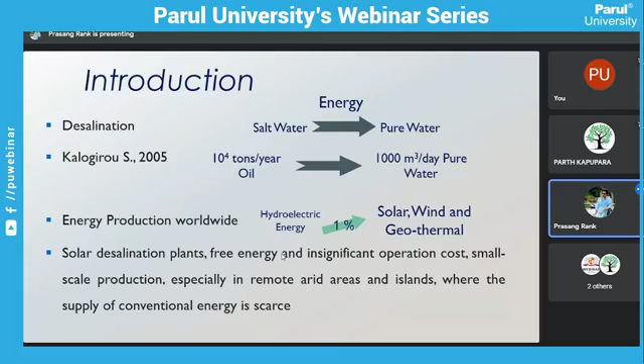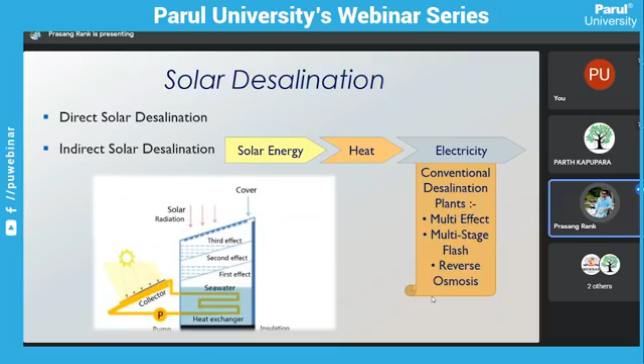Coming to direct solar distillation: this is a picture showing sea water at the bottom of the solar distillation tank, with a glass cover. The radiation coming to the bottom of this plant, the solar distillation tank, the heat energy will convert this seawater into water vapor. Compared to the outside temperature, inside temperature will be more. The water vapor will condense over the glass, and this condensed water can be collected at the bottom of the tank.

In this way we can get fresh water, but it is very less effective. We will get only 200 meter cube per day even in a big area. It is having low operating temperature and low pressure, so we get less efficiency.

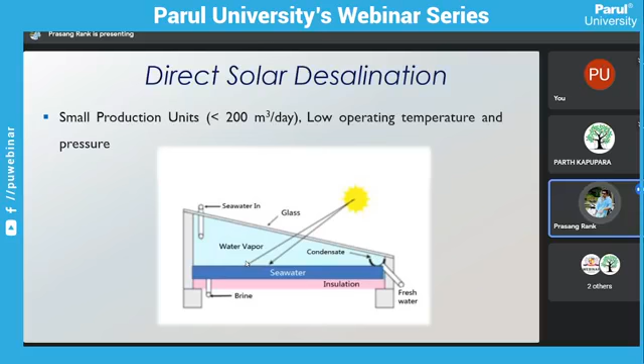So this was a solar still, a single effect solar still. There was only one side, the glass.

This distilled water is generally potable. So what is potable water? Potable water means drinking water, free from salts, inorganic and organic components. Also microbial bacteria are removed. So this way we get fresh water which can be used for drinking purposes.

Also, after the salty water gives off water vapor, sludge will be formed at the bottom of the tank, which can be flushed out through any external water flushing device.

It is said that to produce a maximum of 9 liters per meter square area per day of water, including heat losses, it requires a maximum of 250 watts per meter square of solar radiation for 24 hours. So it is very much less effective, because we require 250 watts per meter square for 24 hours.

Garcia Rodriguez studied this single effect solar still and stated that it gives only 30 to 40 percent efficiency, which is very low. So it has low thermal efficiency and low productivity. It is said that to evaporate 1 kg of water at 30 degrees Celsius, it requires 2.4 into 10 raised to 6 joules of energy. To get this much energy from the sun, we require more efficient techniques of solar desalination.

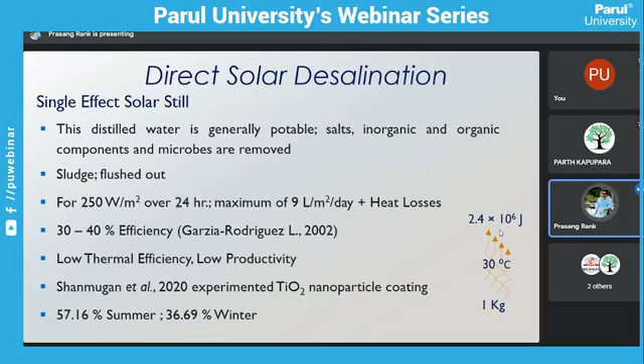Now coming to indirect solar desalination technologies. In this, we are not using direct solar heat, but we are storing the heat energy and using it to produce electricity or any other heat source medium for solar desalination.

So the heat will be trapped in the bottom layer, and through some heat exchanger or tube, we can use this hot water at the bottom for solar desalination or to produce electricity. Generally the lower layer reaches 70 to 85 degrees Celsius during the daytime, and this can differ between summer and winter according to the temperature.

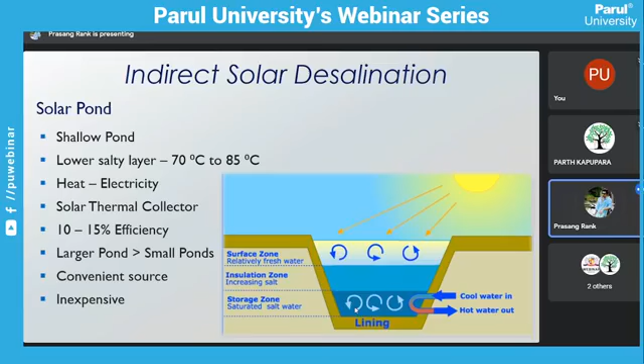This solar pond is used for getting heat from the bottom of the layer, but it is having only 10 to 15 percentage efficiency if we are using small ponds. If we are using large ponds, the efficiency will increase according to the size of pond. So this is a more convenient source. There are no moving parts, so we don't need any mechanical thing. It is a simple thing. Also, it is inexpensive.

We can also optimize the salinity gradient solar pond. So solar pond is also named as salinity gradient solar pond. There is a difference in salinity between two layers, so it is called salinity gradient solar pond. We can use some optimization technique to increase the evaporation. So they have used an NaCl and Na2SO4 mixture to optimize the solar pond efficiency.

Assari et al. studied this in 2020, and they found that a controlled amount of Na2SO4 improves the thermal and salinity stability. Different amounts of Na2SO4 and NaCl were studied, and they found that some controlled amount of Na2SO4 will improve the thermal stability and also improve the storage capacity of heat at the bottom layer. A high percentage of Na2SO4 requires less time to stabilize and also reduces the density gradient, so it causes the rapid destruction of the upper layer.

So it was found that 0.75 percentage of Na2SO4 was perfect and optimum for maximum extraction of heat from the solar pond. And to prevent algae, they spread HCl spray and a high percentage of Na2SO4, so the algae won't be covering the surface area. So in this way, Assari et al. studied this solar pond, and showed how we can optimize the solar pond energy and how we can use it.

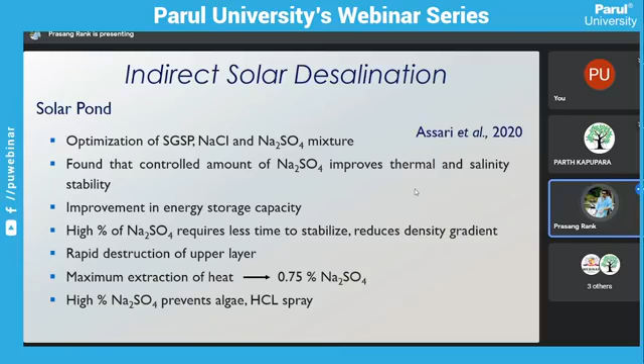So it was not much efficient. The flat plate collectors were not found useful for desalination technologies because using this hot water or hot air, it was not getting much efficiency compared to the direct solar desalination technology. So they used FPC as an additional energy source. If we are using some major energy source like electricity and we are getting less, then we can use this FPC as an additional energy source to complete the whole solar desalination plant.

So in Mexico, this desalination facility derives energy from flat plate collectors and parabolic troughs. Parabolic troughs are a type of parabolic glass reflector which concentrates the energy at the center onto any material which can get heated, and we can use that heat source. So in this way, FPC is used.

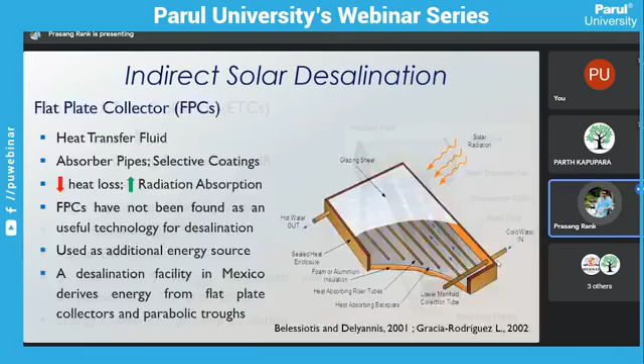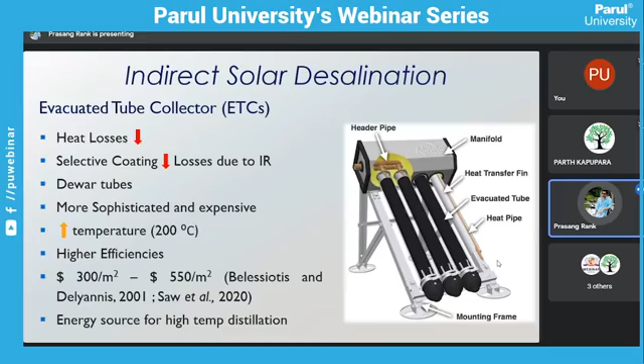So it is for high temperature distillation plants, we can say, which can be used for solar desalination, and also the cost is optimum, so it can be used at medium scale plants.

Now coming to the high scale plants which are having more area, we can use the multi-stage flash process. Aliku O. in 2017 studied the whole process. In this, there are several chambers; in more area we can use this multi-stage flash process. So there will be several chambers, and pre-treated saline water will be used. So here you can see the process.

So here there will be different nth stages, so different stages of flash process will be used. In the first process, high temperature and high pressure will treat the pre-treated saline water. Due to the high temperature and high pressure, the boiling point of water will get reduced, and it will directly get into the first stage. So in the first stage, water will be sprayed.

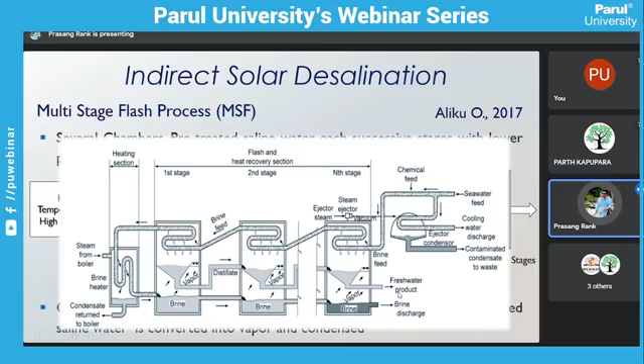Due to this hot brine, the water vapor will go above and will condense from this pipe. So it will be collected here, and again it will go to the second one. So in this way, through different stages the pre-treated saline water will be passed, and we can calculate the number of stages according to our volume of flow. And at the end stage, we will get the fresh water as a product, and also sludge or brine we can collect from the bottom.

So boiling water in the flash chamber, the pressure is suddenly reduced. So due to that, the water will directly get into water vapor, and it will get condensed above, and again it will go to the second chamber. So different chambers will be continuously going. So in this way, we are using this multi-stage flash process. So coming to the

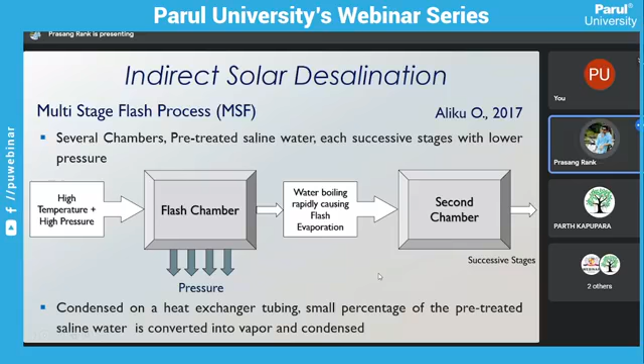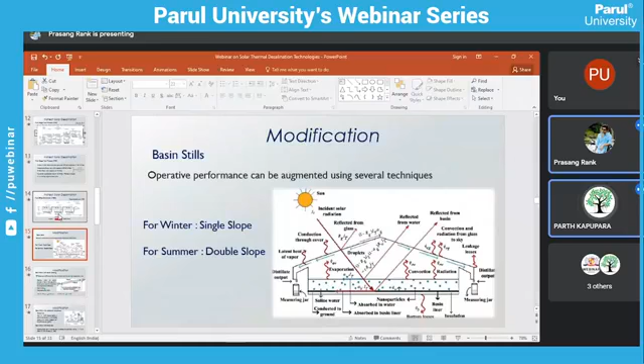My screen, if you are getting my screen. Yes. So when was I removed, sir? Next slide. This was completed. Yes, this one. Go on. Okay. So as we studied multi-stage flash process. Go on. Next. Okay, sir. Could you please minimize the presentation? Yes, sir. This slide. No, next. Oh, yeah, 14th, this number. 14. Okay, sir. Yes.

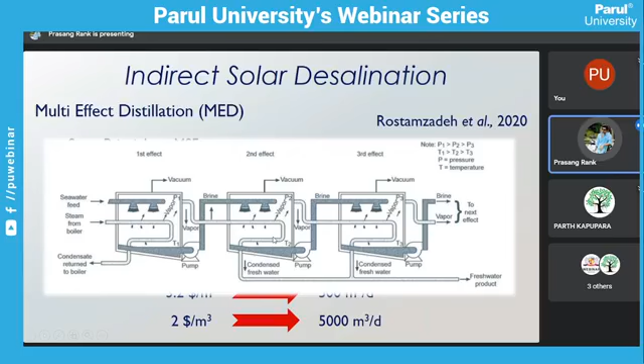The steam will come from this boiler, and the water vapor of the first chamber will be used as a heat source for the second chamber. So the efficiency of the plant will also increase. We will use the pump to transfer all the brine water into each chamber. So through this distillation process we are using the heat source of the previous chamber. So this requires a very less amount of heat energy, and also it is very efficient. And also the fresh water will be collected from each chamber.

So it is working on the same principle as the previous one, but here we are using vacuum conditions, and it is more efficient than multi-stage flash chambers. If we need more efficiency, we will increase the number of chambers. But what happens if we use multiple chambers? We need to create vacuum in each chamber. It will require high operating cost. So we have to consider some optimum number of chambers for optimum flow of water to be converted into fresh water. So more number of chambers, higher performance ratio of multi-effect distillation.

So Fiorenza in 2003 estimated production cost: to produce 500 meter cube per day, it requires $3.2 per meter cube. And if we require more water, then the cost is getting reduced. So see, from 500 to 5,000, the cost is reduced from 3.2 to $2. So higher the chambers, the cost per meter cube of water to produce, like dollars or rupees per meter cube of water, will get reduced.

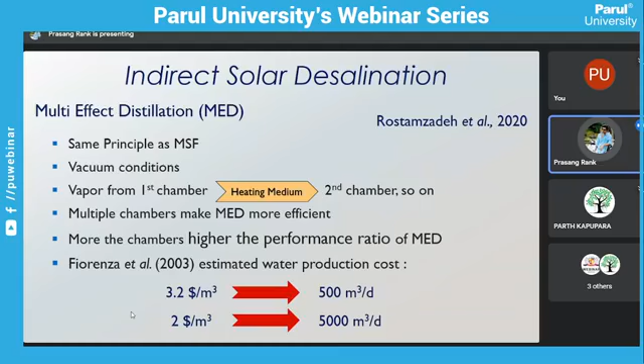So we can also modify the plants. We studied direct and indirect solar distillation plants. In this, we can modify each and every plant to increase the efficiency. So to augment the operative performance, you can use several techniques. The first one we studied was the single slope solar still. Here we are seeing a double slope solar still. Two side glasses we are keeping, and at both sides we are collecting the fresh water. In this way we can increase the basin still performance.

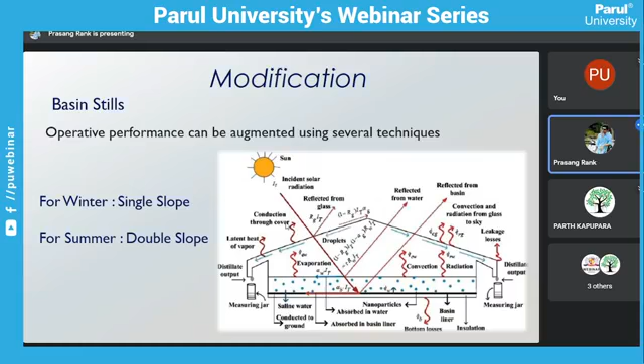Again, what we can do is in a single effect still, if we keep two glasses and in between the two glasses we continuously flow cooling water, the efficiency will get increased. Why? Because there is a higher temperature difference between the basin and the cover. So the evaporation rate will directly increase. Any cooling water or saline water we can use to flow through that gap. It will maximize the temperature difference between the water inside and the water flowing from the top. So condensation will also increase and we can get more fresh water.

But with this cooling, the cost is also high. We have to make this arrangement, and also we have to continuously pump the water. So it will also increase the cost, but we'll get fresh water and efficiency will also increase. Manjunath in 2020 studied and stated that distillation output is increased 3.32 times compared to the non-modified version, and the still efficiency is increased 7.3%. So it increases the output capacity and also the efficiency of the still.

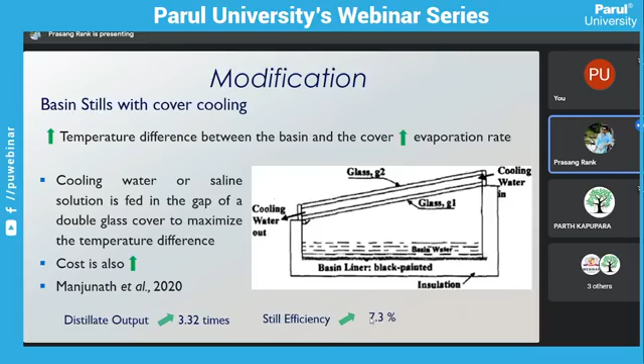Then instead of the water flowing, you can use some pump or an additional condenser to condense the water at the top of the shaded area. Fath in 2002 found that by adding a passive condenser in the shaded region of the glass, if we use an additional condenser with a single slope still, the efficiency will increase 45%. But we are also using a fan on electricity. Again, the operating cost will be high.

Another modification is, if black dye is mixed with the seawater, the black dye acts as an absorber. So more heat will be absorbed from the sun, and more water will be evaporated. Injecting black dye in the seawater increases the distillation yield by 11 to 16%. As the distillation yield increases, the cost will also increase because of the cost of the black dye. How much percentage of black dye to be absorbed in the water, we have to study everything. So in this way, everything we can use.

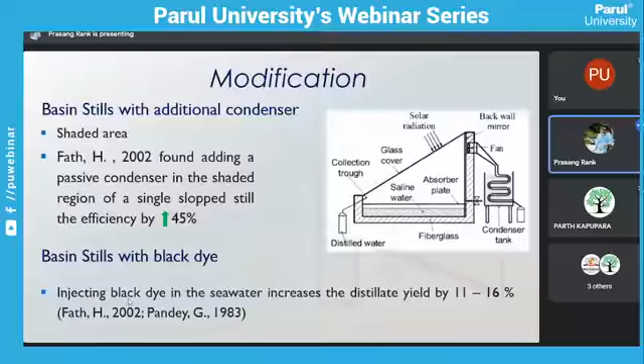Then also the wick still. So what is a wick? A wick is what in Gujarati we call kothra. If we spread it over here, the evaporation of the water will increase. We use wick material spread over the tilted plate, and heat absorption will also increase. We have to find an optimum angle so that we can get more absorption of heat. Each time, only a small amount of water comes over it. So with less water at a time, it will get heated more quickly to a high temperature, so more evaporation will be there.

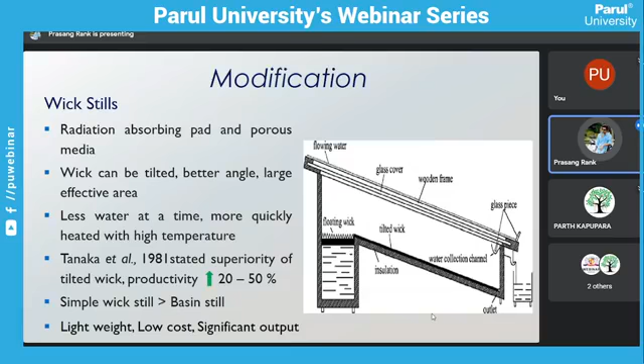Tanaka in 1981 stated the superiority of the tilted wick, with productivity increased from 20 to 50%. So we can use any wick material to increase the productivity. Compared to the single effect basin still, the non-modified one, the efficiency will be far better in a simple wick still. A complex wick still will get more efficiency, but the cost will also be high. The simple wick still is lightweight, low cost, and has a significant output.

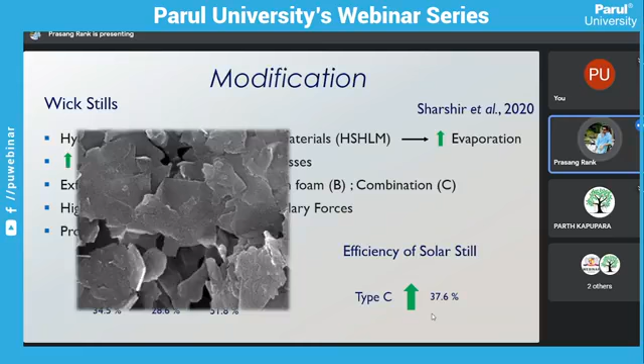So the hybrid structure of heat localization materials increases the evaporation. So what is this HSHLM? It is different types of material. Here we are seeing carbon, like graphite flakes, carbon foam, and a combination of both. This one was graphite flakes. This one is carbon foam.

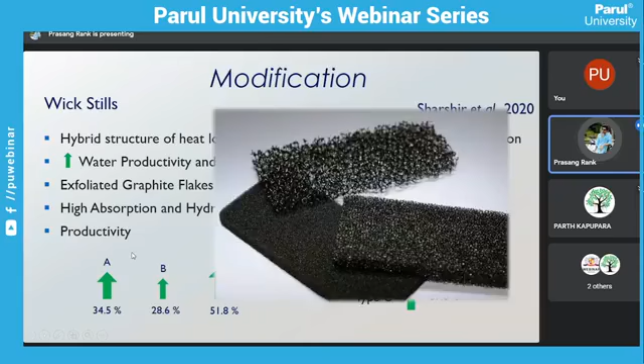So these two materials we can use as a wick to increase the evaporation or high absorption, and also hydrophilic capillary force. Due to the material's ability to capillary the water, the evaporating temperature will decrease, and also less amount of water we are keeping over the wick, so the efficiency will directly increase.

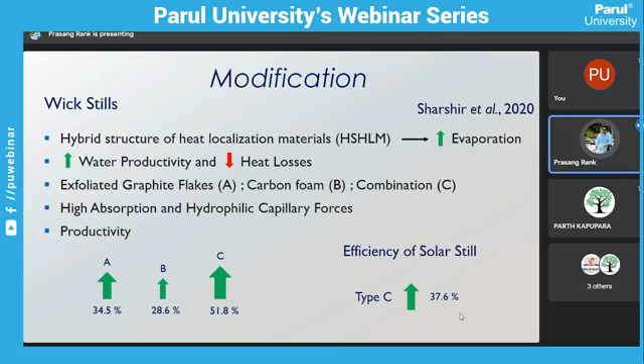So here see, the productivity of exfoliated graphite flakes used as wick increases 34% productivity. By using carbon foam, it is 28.6, and by using a combination of both graphite flakes and carbon foam, the productivity increased 51.8 percent. And also the efficiency of the solar still in combination of both increased 37.6 percent. So in this way, different types of wicks we can use to increase the productivity of solar still.

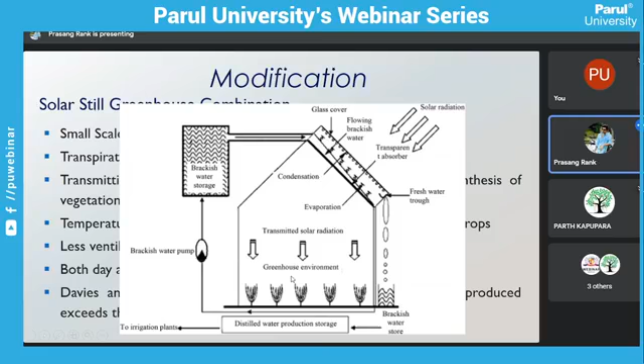Now another aspect is greenhouse. Greenhouse is getting more popular. So what if we use greenhouse and solar still both as a combination? So here we can see the photo. At the top, we are having the single still evaporator, and this is the greenhouse. So water is pumped at the top of the solar still. The water will get evaporated, and the fresh water we are collecting here. And this fresh water we can use to irrigate the plants in the greenhouse. So what is the benefit of it?

So the inside temperature will get minimized due to the solar still at the top. The inside temperature will be optimum, so transpiration will get reduced. And also it is used in small scale systems only, because at the top we can't use a heavy system. So 25 meter cube per day or less only we can use, and also in the remote areas. So the wavelength transmitted in the greenhouse is the photosynthesis wavelength from 380 to 710 nanometer.

So the temperature of water at the top won't be much, and the efficiency won't be as high as compared to the other types. But the temperature inside the greenhouse will be lowered, and the climate for the crop will be better. So we won't require any ventilation requirements, and also water consumption of the plant will reduce because the transpiration is reduced. So in this way, this solar still greenhouse combination can be very useful. The heat inside the greenhouse can be used at night time also to evaporate the water in the top.

So Davies and Paton in 2005 stated that the amount of fresh water produced exceeds the evapotranspiration requirement of the crop. So in the daytime, the transpired water will be less, and also evaporation will be less due to the solar still at the top. So what they told is that the amount of fresh water produced from the solar still is more than the evapotranspiration of the plants inside the greenhouse. So if we are using this fresh water as irrigation, we are still having some amount of water left for other purposes. So this is a very modern concept, the solar still greenhouse combination.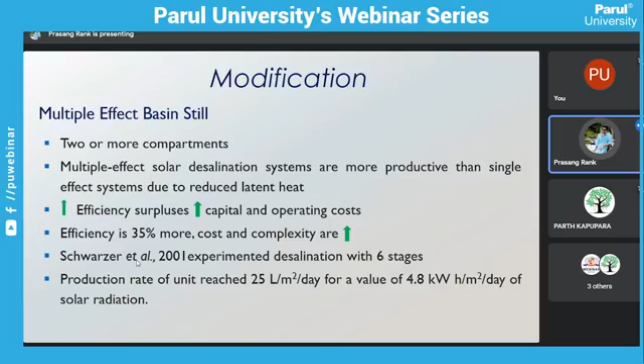Schwarzer in 2001 experimented with desalination with six stages. So here we saw the photo of 3 stages. Same way, for 6 stages he studied desalination, and he found that the production rate reached 25 liter per meter square per day for around 4.8 kilowatt hour per meter square per day of solar radiation. So we can get a much larger amount of water from a multiple effect basin still compared to a single effect basin. So in this way, we can modify it. So there is a small case study.

At the first, we have seen the use of nanoparticles at the bottom to increase absorption. So that case study, a small case study, I have taken. The case study was at the Research Center of Physics in Andhra Pradesh, India, during January 2018 to February 2019, with global radiation around 1100 watt per meter square.

So what they did, they used titanium dioxide nanoparticles and mixed with Cr2O3 coating for the basin area to achieve more absorptivity. And titanium isopropoxide was used for titanium source. So this mixture was used as the coating for basin area. So at the bottom of the area, they used this nanoparticle material to increase the absorptivity of

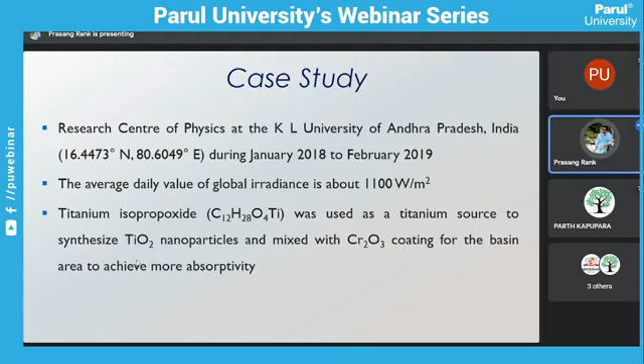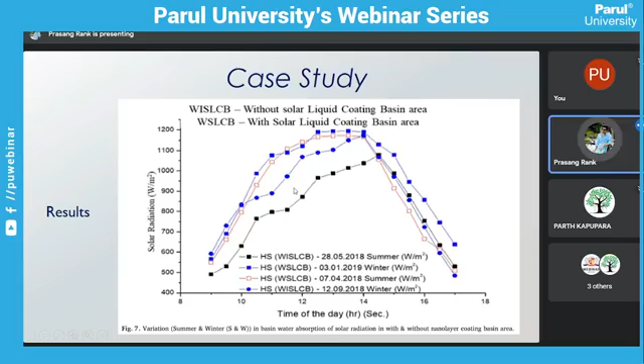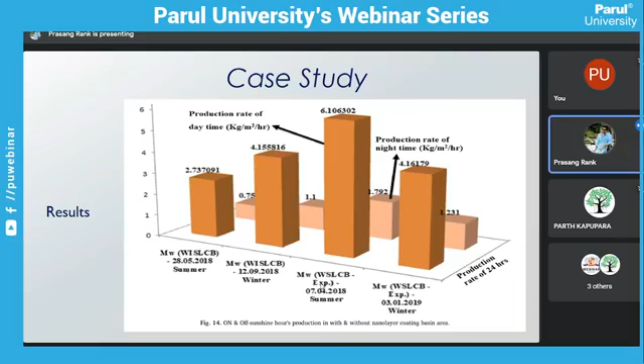At night time also they got around 1.792 kg per meter square per hour output. So this is very much at the night time in the summer. So this type of coating materials we can use to increase the absorptivity at the bottom. So the conclusion of the case study was that the advantage of the nano layer coating is the ability to raise the temperature of the basin by 60.1 and 70 degrees in the winter and summer season respectively. So here we can see around 70 degrees Celsius in the summer and 60 degrees Celsius in the winter was achieved due to this nano layer coated bottom.

And also daily yield was 6.1 kg per meter square per hour per day and 4.1 kg per meter square per hour per day in the summer and winter respectively. Summer we got 6 kg, and in winter we got 4.1 kg. So this is a very highly efficient system. We are using nanoparticles, but again the cost will also be high. But different studies are going on. So with less operating cost, we are getting more productivity.

And also the efficiency of the system in summer with coating was 57.16% compared to the non-coating 27.72%. So see how much efficiency got increased. And also in winter season with coating it was 36.69% compared to non-coated 24.03. So here we can see the differences. In summer, due to high heat, the efficiency increased 30%, and here we got only around 10 or 12 percentage increase in winter. So if we use these modifications in different conventional plants, we can increase the productivity. And the main aspect of these plants is to get more and more output with a less amount of operating and maintenance cost.

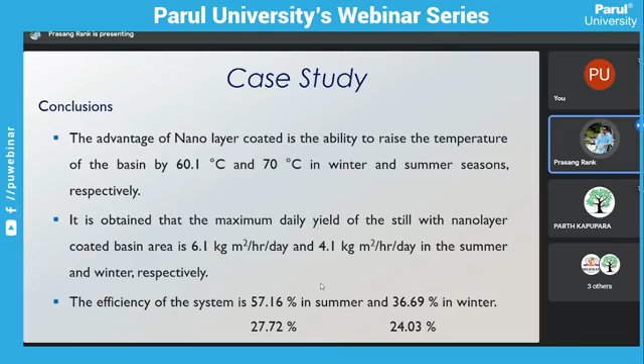So solar desalination is a very good type of technique nowadays used with solar energy to get fresh water which we can use for irrigation or drinking purposes. But nowadays it is under development and research consideration. So in the future we will get some good desalination technologies at the seashore or any ocean. We can use this type of desalination technology which can be very beneficial in our future. So thank you, sir. This was all about solar desalination technologies.